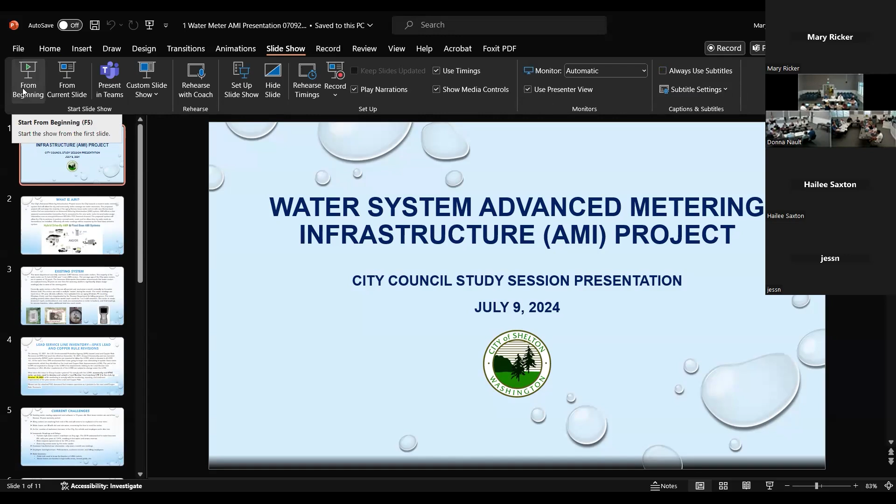It doesn't say it on here, but we are going to add something to our agenda after our first item, and that's going to be, Mr. Mayor, we've received the preliminary design for the creative district Cota Street restriping, so we want to present that in front of council tonight for your discussion and review. All right.

Tonight, Public Works Director Jay Harris and Capital Project Manager Aaron Nix has information for us about advanced meter infrastructure, the AMI project. Good evening, Council. Jay Harris, your Public Works Director.

This is probably the third or fourth time I've given this presentation to Council. This project started probably four years ago when I first started here. And our meters are getting old. The meter reading systems comprise mostly of brass.

At that time, we had some ARPA funds that came in, those are COVID relief funds. And we were able to buy a bunch of meters, transmitters, and meter boxes so we could replace the components in the whole system, not realizing that the Texas Instrument chip that was in the transmitters was not being made for an extended period of time.

So we put in the order, and we finally got all the meters, got all the boxes, but the actual transmitter unit that sends the readings to our handheld data collector were not available. And we just received those parts this February. So this has been a long project.

And Aaron started with us, he's been involved with it. We had plans and specifications that were prepared. And we ripped into those and rewrote contracts and redid the specs and looked at this and looked at that. And got the thing out to bid Monday.

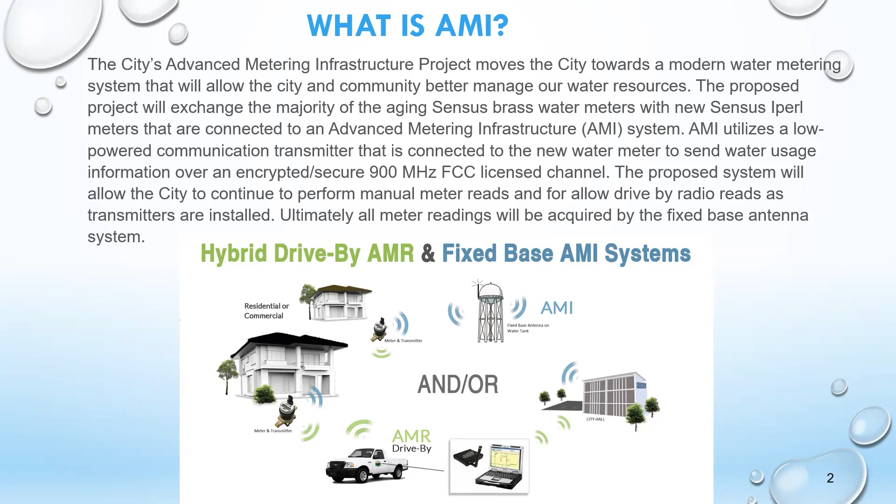This will eliminate that. The meters also have another frequency that we can turn on for a central antenna based collection system, which we're not doing with this project. We're going to be doing it a year from now. What we want to do is get the handheld thing working well, and we have something we can fall back on. If the antenna system goes down, we can always go around with the handheld. People will be trained on it. Then in worst case, we can go open up every meter and look at the number on the dial. It's a digital number. So that's the fixed base system.

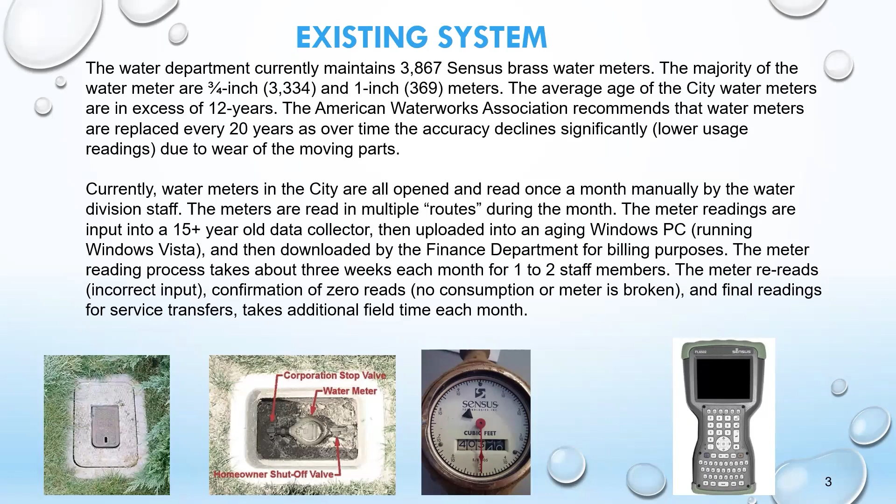So the existing system, you see the concrete boxes and these handy little doors that you can pick up to look at the meter to get the reading off of the dial. Our dials read in cubic feet, and older dials read in gallons, and it's messy work, and it's easy to mess these readings up on the meters. And you can see the data collector there. Next slide.

So we also are doing another thing with the project. At the meter, we have a service line from the water main. It's typically a 3/4 inch or 1 inch service to most residential meters. Then at the meter, there's another service line past the meter that goes to the house. We maintain the service line from the main line to the meter. The property owner maintains the one from the meter to the house.

Because of Flint, Michigan and the copper and lead issues they have in their water system, there's a rule that came out that by October 16th we're going to be required to do an inventory of all of our services in the system to see if they meet different lead copper standards. So as part of this project, since we're picking up all the boxes, we're going to be right there. We'll be able to see what each service is.

Unfortunately, the dates aren't matching up well though, because I'm planning on awarding the contract with you folks in, I think, the first meeting in September. We're not going to have a lot of these, but by the time the contractor gets out there and is done, we're going to have a good inventory this way.

There are other ways we can inventory the system. We know that all services installed after 1986 don't have any lead or lead solder and leaded joints and that sort of thing, so we can rule out a whole bunch of them. Then we have other ways to rule out the rest. So we're going to do an initial inventory with a consultant assisting us in getting this report to the state.

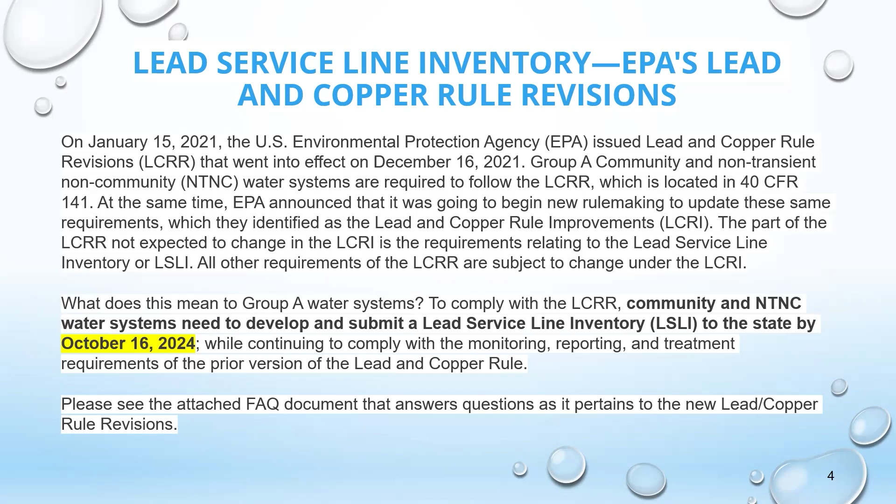Our water folks are pretty confident that if there's any leaded joints, called goosenecks, that go to a galvanized pipe, they're pretty confident there's under 10 of those if there's any in the system. So anyways, we don't think we're going to have much of that going on here, but we want to actually physically get our eyes on it. This project is a great benefit to the lead copper rule.

And we test the water though for lead. We're required, on a 2-year rotating basis, to test homes that were built prior to, I think the state health department has a bunch of rules, built before 1970. We have an inventory of those. We select certain ones in different neighborhoods.

And then the property owner, we give them the test kit. Because you let the water sit in your pipes all night long, and the first flush in the morning, we want that sample. That's the one we want. So if anybody's concerned about their water quality, just run the faucet for a minute or so to flush it out, and that will take care of any issues.

Most of the problems are actually in the house piping, not on the service lines. The actual pipes in the walls are more of a problem with our type of system than the actual service lines. A lot of houses built in the 50s with copper pipes have a little bit of lead in the solder. So it's always good to flush your water if you don't know the state of your pipes. If you have an older home and they haven't been replaced, it's a good idea to run your water. You can also have your home tested too if you're worried about it.

So our meter reading equipment and software is 15 years old. We actually fixed that, we updated the meter reading equipment to go to the cell phones, and the software was updated in finance. So that's happened since my last presentation.

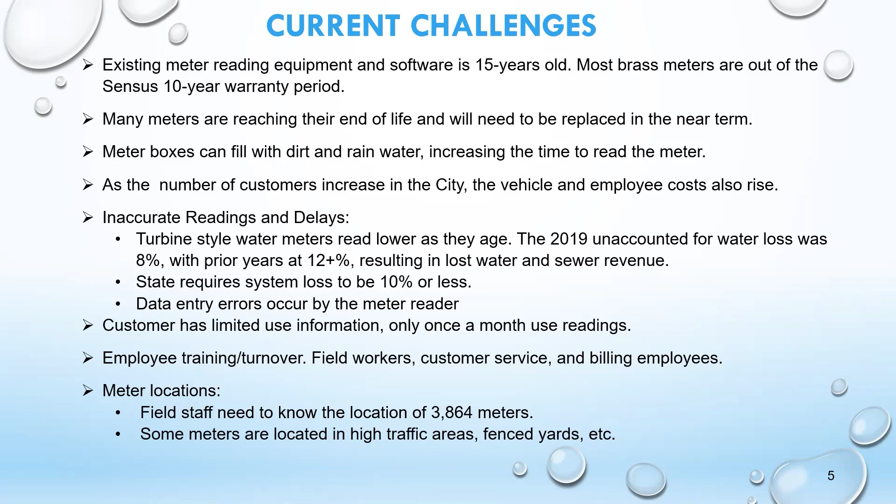So the current meter reading process: the utility billing gives us a list, and there's 8 routes for the meter readers. We drive, walk to each meter, get the reading, enter it into this little handheld device. Then we take it back to the utility billing department, they download and process the data. And then they have some error checking they do - if there's high reads, low reads, 0 reads, we have to go back out and do all sorts of things. Then there's the inaccuracy part of the meter, we're back out there a lot of the times.

And then the bills are created and sent. So there's a utility billing analyst, a couple meter readers, and 2 customer service reps that take payments up there. It takes about 2.5 weeks to read all the meters in the city, plus any additional time for rereads.

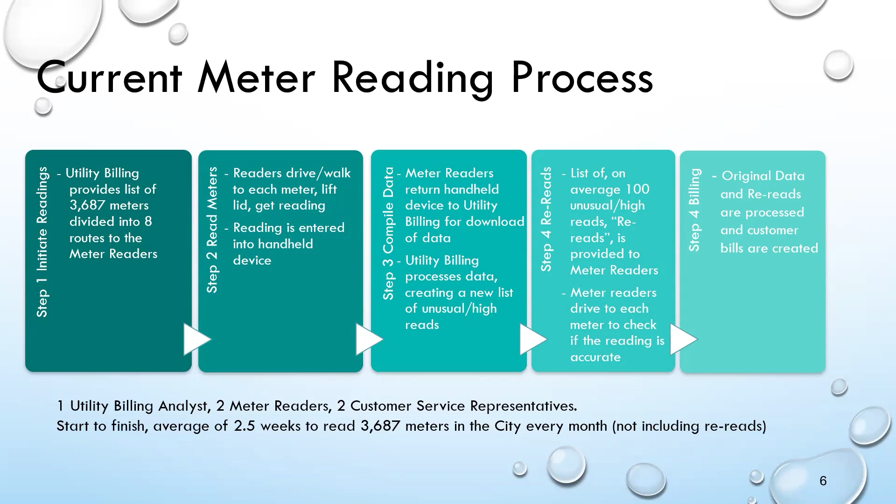Next slide. So with AMI, it will transmit the water readings to a database - this is when the actual fixed base system is in, the antenna. And the billing period will be the same day every month, right? So right now we go out and it takes us a couple weeks to read them all, and they're not all being read on the same day. So the billing period is a little off, right?

Everyone's bills are sent, but the period isn't quite right. We're reading some meters near the end of the month, but not at the end of the month. This system will get us into the correct time epoch for reading, and then we just print and mail the bills, so we save a lot of steps.

The software also sits there and looks at people that don't use any water, where the meter is broken. These are magnetic meters now, they don't have moving parts. They have tamper software too, so if people try to tamper with them, the software sends us a signal. And for unusually high water consumption, like in the middle of the night, it will know - is that person using water in the middle of the night consistently? Not a big deal. But once in a blue moon, it's probably going to send a note.

If we have an email on the account, we can send them a notice or call them on the phone. So it's likely we're going to catch a lot of leaks in houses - the toilet that runs constantly, the meter is always running, the software is all over that. So if you have leaks in your house, we're going to catch it and send you notes. What that does is actually reduce consumption, and it saves the property owner money too.

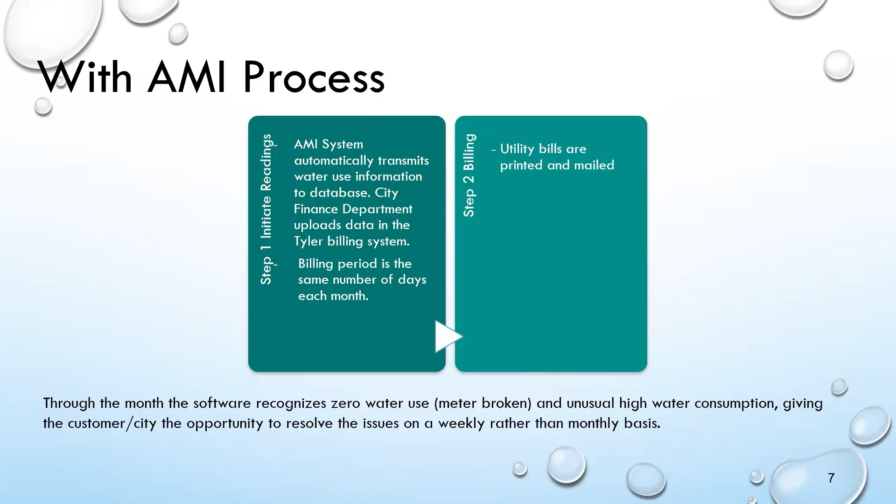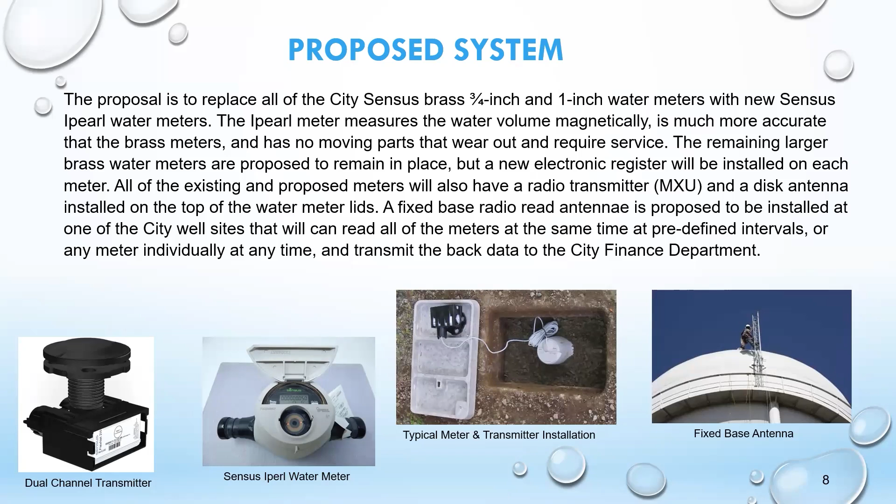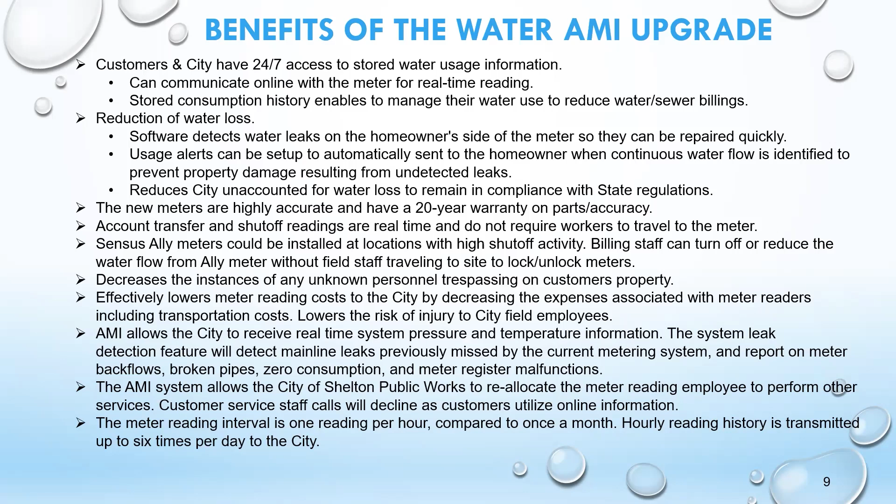On the slide here, I said 1 reading per hour. We're probably going to set it to 1 every 2 hours to save battery. I need to talk to Sensus a little more about that. I don't want to drain the batteries in 10 years on that device, because then I have to go out and replace all of those. It'd be a lot of work, right?

Next slide. So, Aaron, why don't you go over these project costs?

A little bit of background, as Jay mentioned, it's taken us some time to get our specifications in order, because candidly what we received wasn't sufficient. I'm all about protecting the city and protecting staff, and you really have to identify processes in your specifications. A lot of jurisdictions have done some of this, but there's no real standardized specs for it. So we've taken a long, hard look at protecting our staff when they're out there managing a contractor. If something goes wrong, we've identified it in there, so our staff will have the ability to react, with justification behind their actions, instead of just winging it. I think that's important for the council to know. We wanted to do it right, so that's why it's taken a little bit longer.

Brooke, your purchasing and procurement person, has been actively involved. We've also done updates to our contract because of recent legislative actions we have to comply with, such as apprentice requirements and other things. There's a lot of stuff that's been added on. The city attorney has been capping on it.

Correct. So I want to go over costs. It's imperative that the council understand, and I just want to add to Jay's comment, that as we invest in this there's going to be a progression. He was very correct that we're going to see a reduction, not necessarily physically getting rid of people, but a reduction in the use of FTEs.

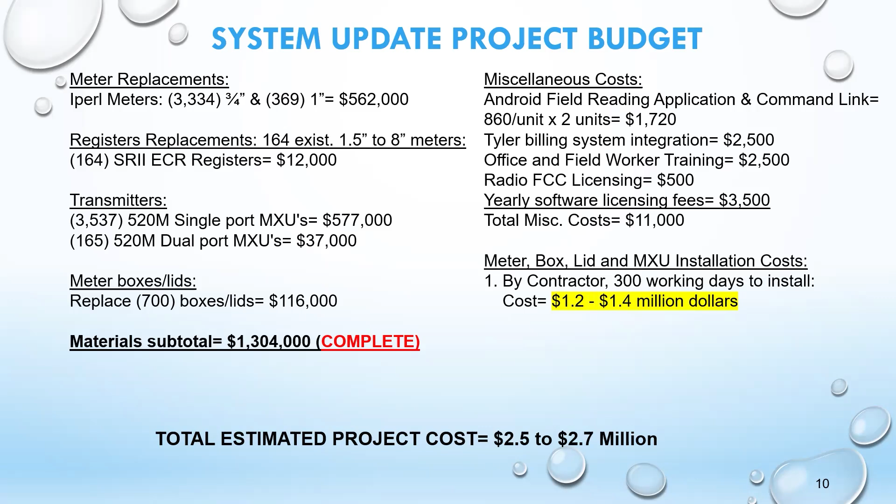I just had a thought, I'm sorry. Go ahead. Yeah, so anyways, we're going to get the bids coming in, we're going to finalize the project costs with those, and we'll be back to council with a resolution, hopefully to award the bid.

If the bids come in higher than what we're estimating, then we'll have to talk to you more about either modifying the contract, which we can go eliminate a portion of the contract, to keep it within budget parameters.

And let's not forget that this project, when it started, the supplies weren't there, so staff installed how many? 500 - 500 in-house we installed while we were waiting for parts, perfect. Staff got 500 of them done, yeah.

So we're going to cut staff hours and contract it out? We could just have the staff continue doing what they're doing, work by neighborhoods. It didn't work that way, we were only getting 8 meters a week, something like that, and then we would have a water line break or have to go repair something else.

You gotta mow the reservoir sites, you have to do water quality checks, and so our staff just aren't available to get on the project. It would be better, a couple of years. It took the last agency I worked for 3 years for staff to get it done, because they kept getting pulled off on other jobs.

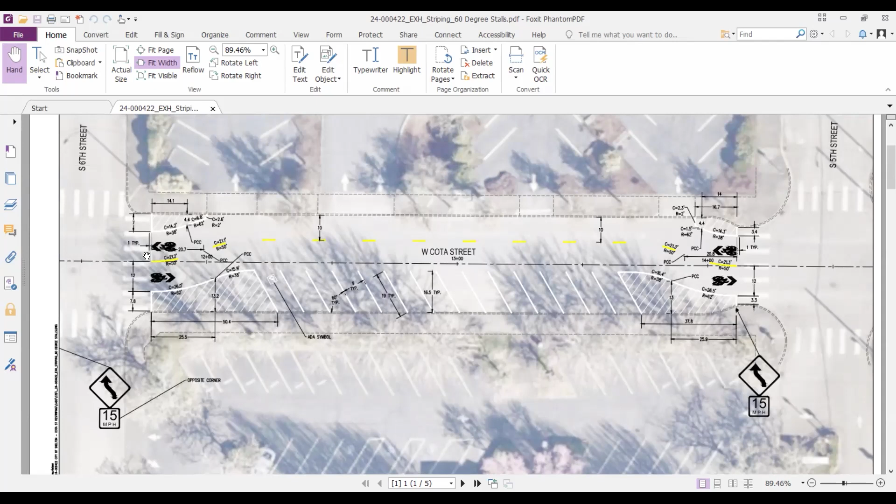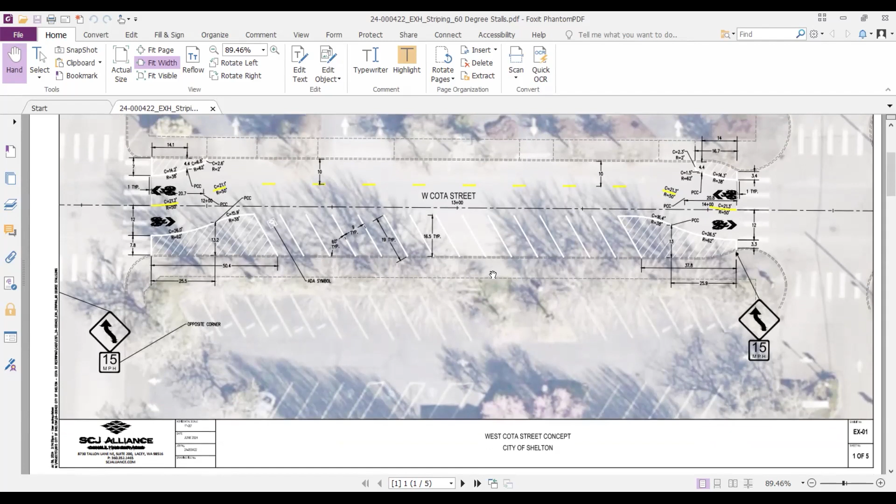So the idea is by painting around the bulb-outs and restriping down the center of the street, we shift the traffic pattern. On this block, the 500 block moving to the north, we have a 10-foot travel lane here and then a 13-foot travel lane on the south side, which will allow for any overhang off the parking stalls we have indicated here. These are standard parking stalls, 19 feet long, and again there's a little bit of overhang for any particularly long vehicles. This reserves these shaded areas that can be used for street trees, ADA access to the ADA stalls, so we don't have to cut any new ramps into the sidewalks. It's within the distance to use the existing ADA ramp curbs. So that was something we thought was really important, was minimizing our cost, but also providing additional accessible parking.

So then moving on to the next block, which is in front of the new paver parking lot and the Baptist Church, we move the parking to the north side so the road shifts. As we did on the other one, we have these sharrows indicated, showing this is also intended for bike traffic. The intent is also to have advisory speed signs here to let people know there's a 15-mile-an-hour advisory curve.

We're not lowering the speed limit. You could still do the full standard 25-mile-an-hour speed limit on the straightaway here. We're just advising people to slow down as they navigate the intersections, which will help with pedestrians trying to cross, people backing out of stalls, people using the ADA ramps, and all that kind of stuff. The slower speed around intersections is going to prevent accidents. It's really just meant to slow down for safety, and also for visual interest.

As you're going slower, you'll see, oh, there's a business there. I never knew that was there before. Or, oh, that's really cool, let's stop and look at this public art, or let's stop and get a cup of coffee. The slower traffic speeds on Cota are intended not just for safety, but also for placemaking purposes.

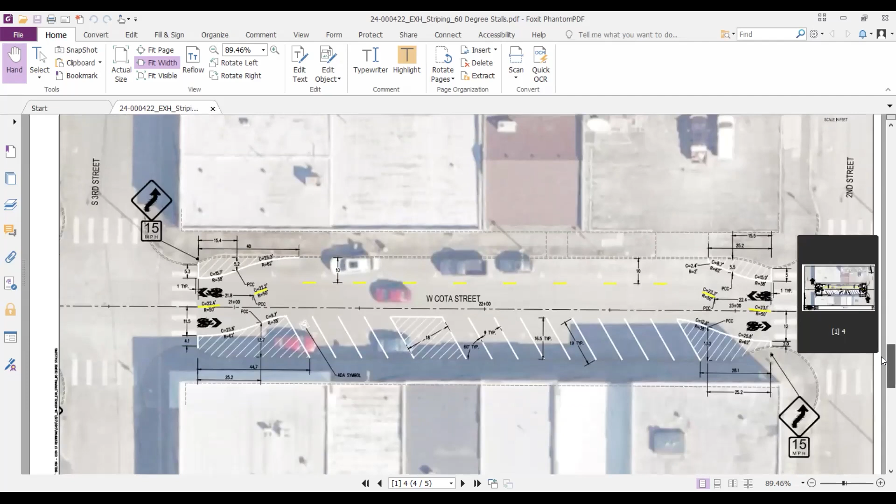And then moving along to in front of Marmo Gallery. So Marmo Gallery is right here. The food bank is here, Saints Pantry, sorry, and Mason County Journal is right here. So again, we're shifting the traffic to the north side, just right here. We are reserving this area, which is 2 parking spaces worth of parking.

Marmo has a request in for outdoor dining on Cota. Anybody who's tried to get a cup of coffee in front of the cafe and gallery right now knows it's pretty shady during good parts of the day, and they want something that's out in the sun and a little bit more visible. So we'll have the ADA space, we'll have the planters on each end of the block, and again, they're only 18 inches tall, so they won't interfere with sight lines or traffic. They'll be low, and only 36 inches wide, so they'll be out of the way as well.

And then we'll have the sidewalk dining down the middle, and anybody along this entire length of street, if they wanted to do the same thing, could submit for a right-of-way permit and have some space for sidewalk or street side dining as well. If anybody's been to Ballard, on Ballard Avenue the entire street is now essentially street side dining with permanent little structures and everything. We're not planning permanent structures, but at least we'll have some temporary availability and try to get a little more pedestrian activity out on the street.

And then finally, we end up down here at the intersection of Cota and First. This is where the stoplight is. We retain access for the driveway here. And again, we have the space for the planter box. We have the ADA accessible stall. This is a net gain of parking spaces down the entire length of the project. So we're adding more parking, we're adding ADA parking, we're slowing traffic, we're adding street trees, and we're doing it all for a really reasonable price.

So that being said, I'm happy to answer any questions, or pan back up to different parts of the document or anything like that if anybody wants to know more or has any more questions.

So you said there's a net gain of parking spots, but how many? After the reconfiguration, because we've had a couple of different rounds of this, across all 5 blocks, we pick up about 8 parking spaces right now total. And that includes the addition of the ADA spaces as well.

And you said low cost, but you didn't say what the costs are. The cost of paint and the planter boxes, really. So it's just a matter of putting paint on the ground, as opposed to if we were doing something that required curbing and excavation and stormwater improvements and a $1 million street reconstruction. This is just a couple thousand dollars worth of paint. I don't have the exact cost of how much paint that's going to be just yet, but it's a pretty minimal amount.

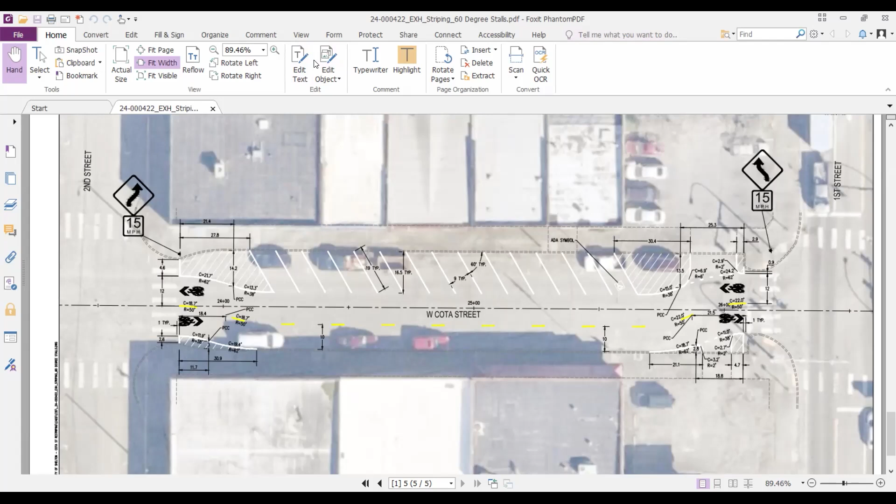You have parallel parking that slows people down also. The lights are on, and if it turns out to be a big problem, they might have to go down another street. Luckily, we have a good grid system, right? There are multiple ways out, yes, we considered that and talked to PD. They can head straight out to railroad from Fifth here as well, and then take a left on Cota. If they're heading west, that's one block of this configuration they hit.